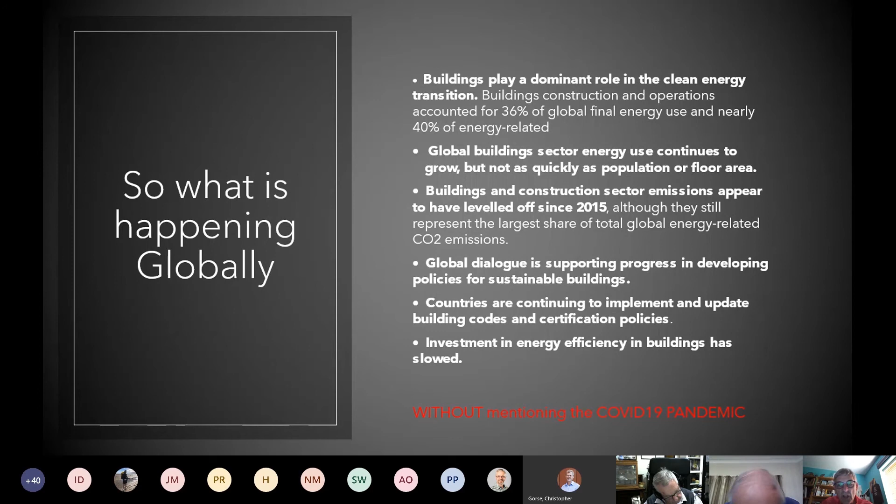And there's certainly investment in more energy efficient ways of constructing buildings. So that's just an overview. And I suppose COVID has impacted on all of this, but I'm not going to discuss that today in terms of where we're going.

Sustainable cities, and what do we mean? So a definition coming from the World Green Building Council. And I've highlighted there, wherever possible, renewable resources are used instead of non-renewable resources. And the image below there shows the Sidewalk Labs in Toronto, where Google were investing a huge amount of money. They've since pulled out, but the project still remains going ahead. And again, it's an effort by a community to try and change in relation to using more renewable sources and creating an environment that actually works for people.

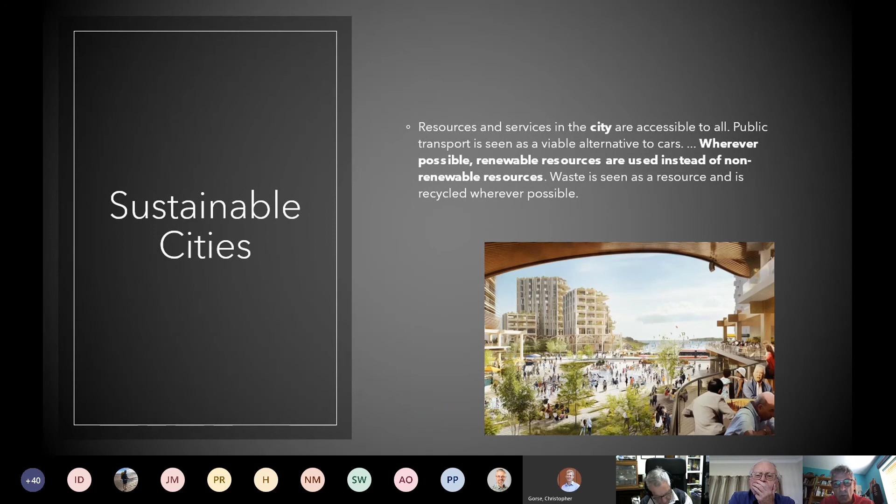Green buildings, what are they? I suppose, unfortunately, you can see the building at the bottom. Just move that aside there.

So what is a green building? And again, the World Green Building Council give a definition of what it is there. A green building is a building that in its design, construction or operation reduces or eliminates negative impacts and can create positive impacts on our climate and natural environment. Green buildings preserve precious natural resources and improve our quality of life. So that's the aspirational view in terms of green building from the World Green Building Council.

The building on the bottom there is our Central Bank in Dublin, and that is regarded as a very green building. And comparing it to the architect's impression of the building up on the right there, where we see greenery around, a comparison between those may not evidently show that the building on the bottom is actually more green than the one on the top. But again, we need to be thinking about how we impact on our environment in terms of those buildings.

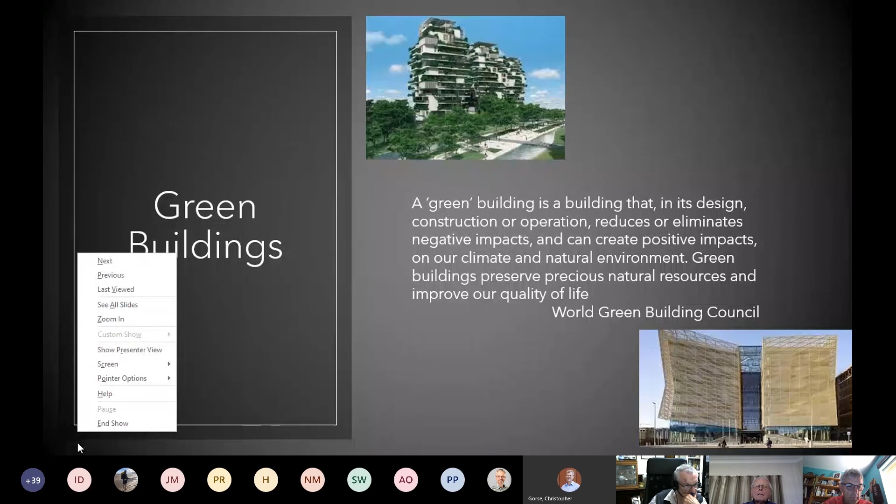Apologies. So timber as a solution then. Well, timber is now being allowed, and building codes are taking effect in relation to actually building high rise. And you can see there, and I'll give some examples of where we're going with high rise. But again, as a solution, we're now at 18 stories, where mass timber has been used in 18-story buildings around the world. And again, with research and development, architects and designers are looking at going higher.

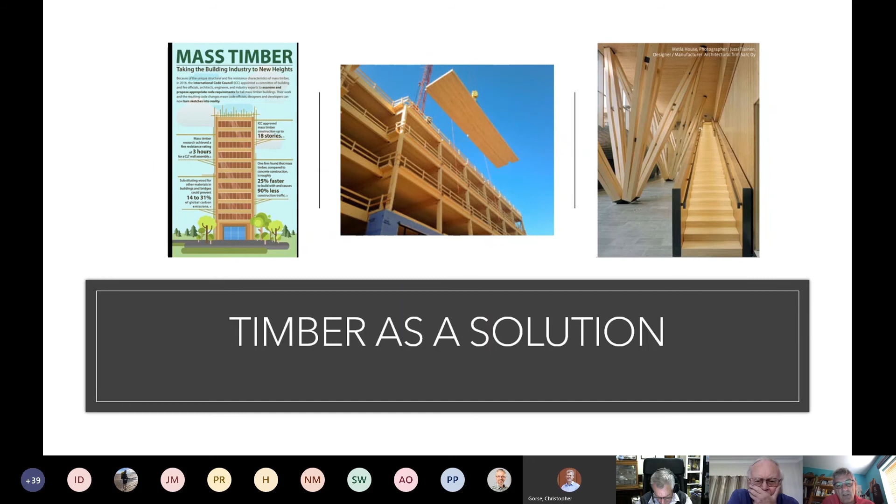The flexibility in terms of delivering projects on time. It's modular construction. It's using prefabricated units to actually build a building. So therefore, there's actually a lot more control over the projects. And aesthetically, certainly wood is very, very appealing to people, and the warmth that timber exudes is really a factor that actually helps people in terms of going forward.

What is an issue is developing the strategies in order to actually maximize the use of that material and do it in a sustainable way. And the majority of the stock taken from forests nowadays actually comes from managed forests, where they actually get certification around the extraction of wood from the forest.

Examples here, again, we have advanced not only in digital technologies, but actually in manufacturing technologies. And the slide here just demonstrates some really interesting examples of mass timber in use. And again, the advantage of timber is it's versatile. If you look at the image on the top right hand side there, it can be actually used with other materials, and connectors can be of steel or aluminium or whatever, or solid materials other than wood, to allow for those connections to be made. The advantage of mass timber is it can also be used as flooring and walls.

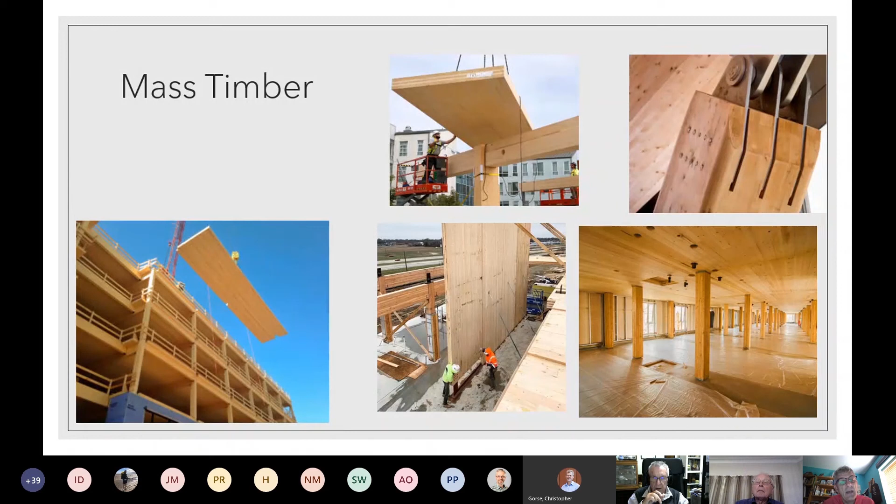And while people have a mistrust of timber in terms of fire resistance, actually timber is better in terms of fire resistance in a fire than steel, because timber, when it gets to 300 degrees, actually starts to char, and in terms of the full material being damaged, it doesn't react to fire in the same way that exposed steel would, for example.

Again, now I'm going to focus on different countries there. The image there, that's the kind of side view of a cross laminate beam. And you can see the makeup of it is different laths or lengths of material. It's used similar to the way plywood is manufactured, in that it has layers going in alternate directions. And that gives us the strength and stability to be able to be used in the construction process.

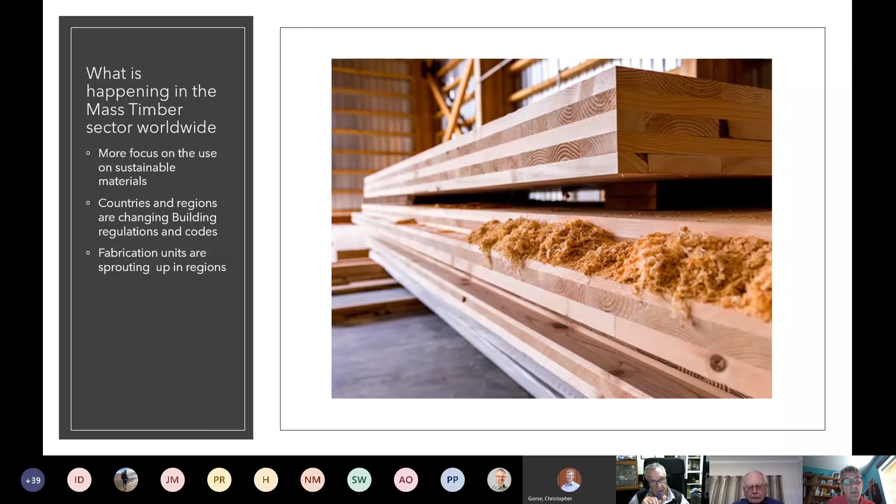And because we've advanced with technology, we can now manufacture boards up to 60 feet long. Structurlam are a company around the world, but particularly in America, and they've just recently signed off on a fabrication unit down in Texas, where they'll be able to manufacture 65 feet panels. So again, it's an interesting area.

The slide here, I'm just going to take you through a couple of regions in the US. So what we have here is some data in relation to North America and where it's going. And you can see the chart on the left-hand side there. The Americans by 2034 per year are looking to do 24,000 units in mass timber. Now that's a huge projection, and you can see the rise as we traverse towards 2034. But again, it's a commitment to building buildings through the use of mass timber.

Currently, last year in 2019, there were 78 mass timber buildings constructed in the US, and it's great to see in terms of advocating mass timber buildings. There are a number of universities in the US that have actually engaged in building mass timber buildings on campus, and I'll return to that on the next slide.

The next building here on the right is a building that's currently in construction in Milwaukee. It's going to be completed in 2021, and it's going to be the tallest mass timber apartment tower in the US when it gets completed. They're actually out of the ground at the moment, and they have a concrete platform and then they're building on top of the concrete platform with the 18 stories of mass timber.

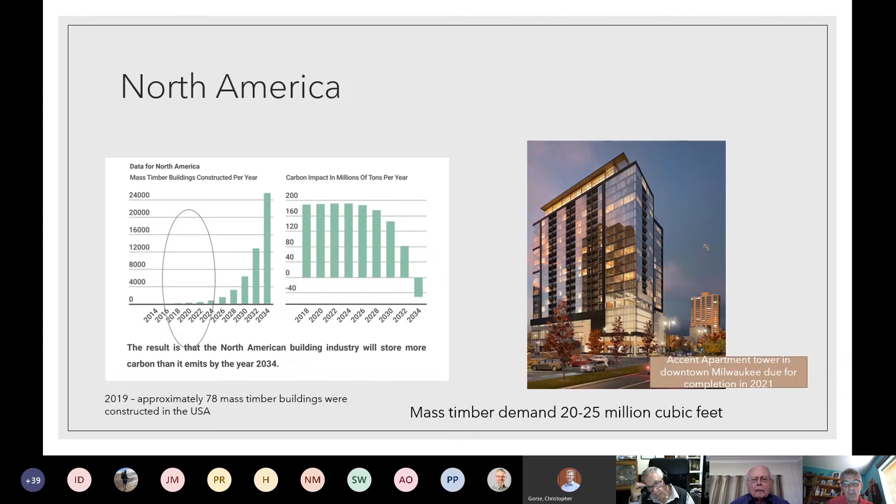But the function of it was to use it as a teaching tool. So engineers and built environment students get access to this building, and all the exposed structures are used as a means to demonstrate to students in a visual way how the building is actually put together. So again, as I said, universities are leading the way in educating students around the sustainable nature of the buildings that they're producing and getting students to engage in.

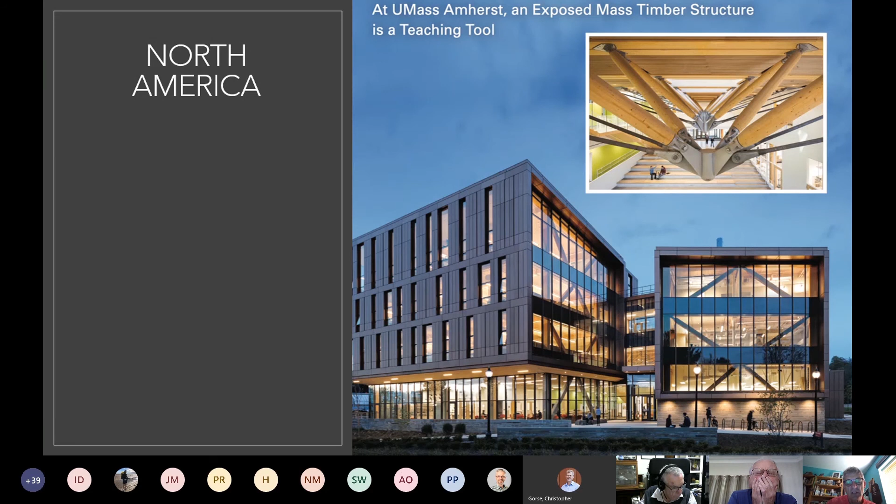Moving to Australia. So Australia's largest timber engineered commercial building is in Brisbane, and again, I'll just move him up there. It's designed by Bates Smart Architects, and you can see down at the bottom there the nice use and the nice design around the large mass timber components. But the whole building is mass timber with a glazed front.

On the right then, in Sydney, the International House by Tzannes Architects is a 7-story building, and it's constructed entirely of mass timber and engineered wood. And again, the aesthetics of these buildings are really nice in terms of people being exposed to the buildings internally, and it creates a comfort value.

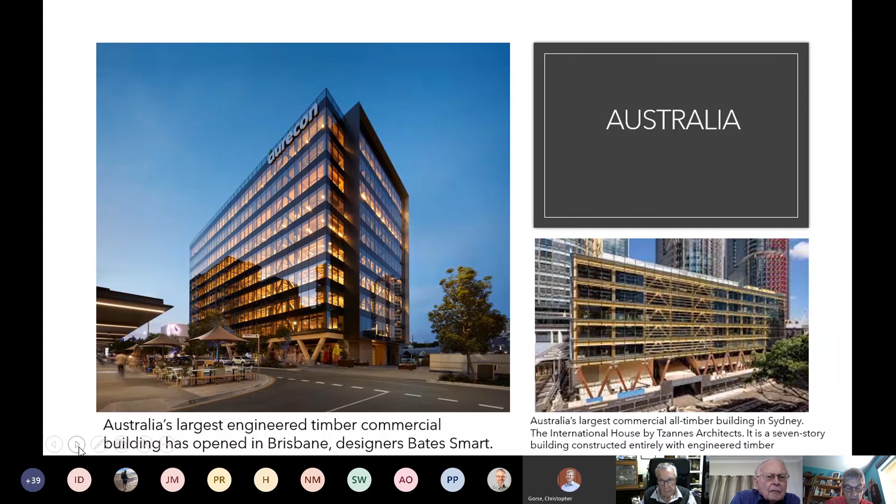South Africa has begun to engage in mass timber, and I know Emma yesterday presented what's happening in South Africa. And again linking in with universities, Nelson Mandela University are currently building the first mass timber building in South Africa, and that will come on stream in the next year or so.

And again, what they're doing in South Africa is focusing on getting the expertise in from international sources in order to develop themselves. So there's a concerted effort from the stakeholders in terms of moving forward on that.

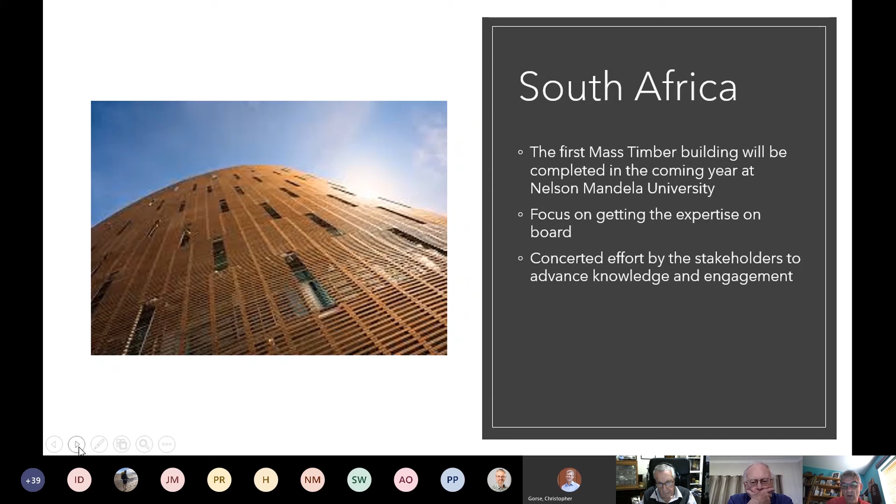Moving to Europe. People suggest that in the 1990s, mass timber was really developed in Austria and Germany. Well, I saw an interesting discourse last week from one person who came across a mass timber example from the 1900s. So I suppose what we have today is maybe higher square areas of mass timber than in the 1900s.

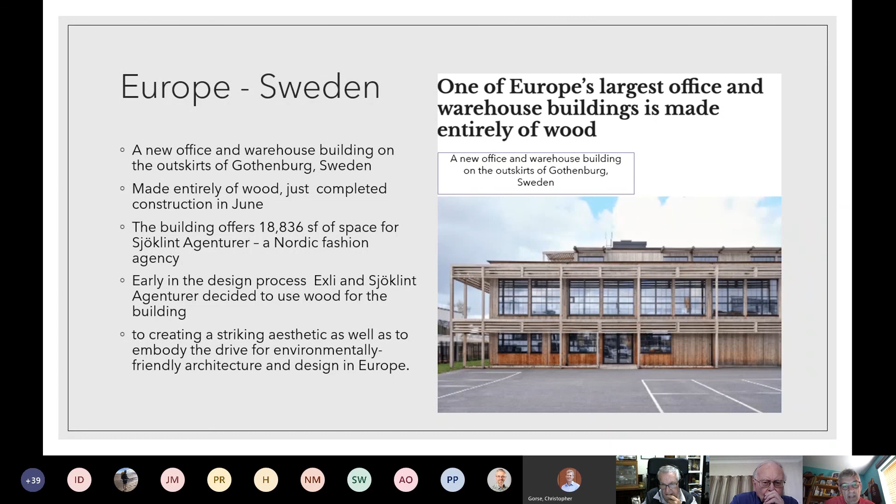But it is, I suppose, across Europe a material that has been used, and certainly Austria and Germany and the Scandinavian countries, because of the proximity of resources to them, have used timber for millennia. And again, this is just an example of a full large office warehouse building built entirely of wood, up in Göteborg in Sweden. It's just a really good example of where we're moving to in terms of mass timber.

Then the image on the right here is one of the main manufacturers of mass timber, and this is their main offices in the Tyrol. It's the company Rothoblaas, and they're doing really good work with designers and engineers in terms of rolling out quality mass timber. And again, we look to countries like Austria and Germany in terms of getting that knowledge and expertise.

In other parts of Europe, France in particular, the 2024 Olympics will be held in Paris. And what the president of France, Macron, has indicated is that 50% of buildings will be timber going forward. So they're working on a project, and this is the designer sketch that we have here at the moment, on a revamping of the Saint-Denis region or arrondissement in Paris, where they're going to house all of the Olympic Village and all of the Olympic stadia.

And again, all of the buildings are being designed and constructed with timber in mind. It's a government directive around moving to more sustainable products and sustainable manufacture in terms of the buildings. The Hyperion here was the first French residential tower built with mass timber. Again, it's a 7-story building, and it indicates where things are going.

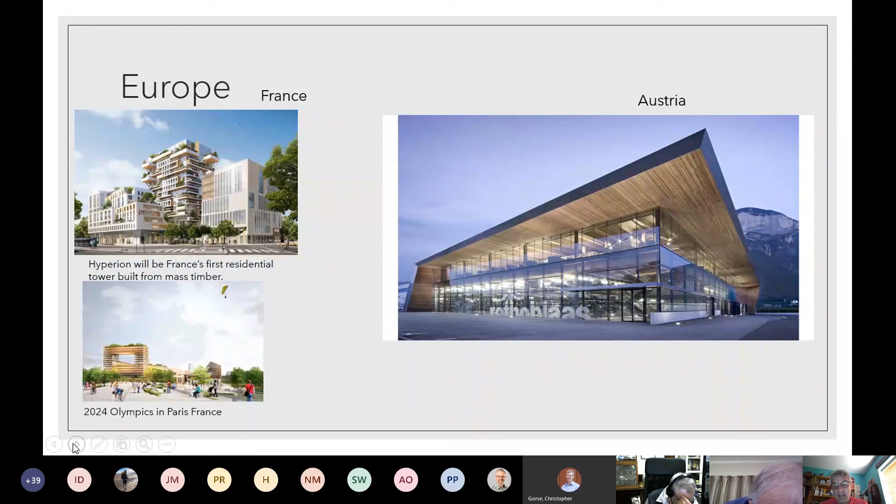The tallest is an 18-story tower, and it was accredited as the tallest mass timber building just before lockdown. It's in Brumunddal in Norway, and again, it's mass timber with a concrete core up through the centre.

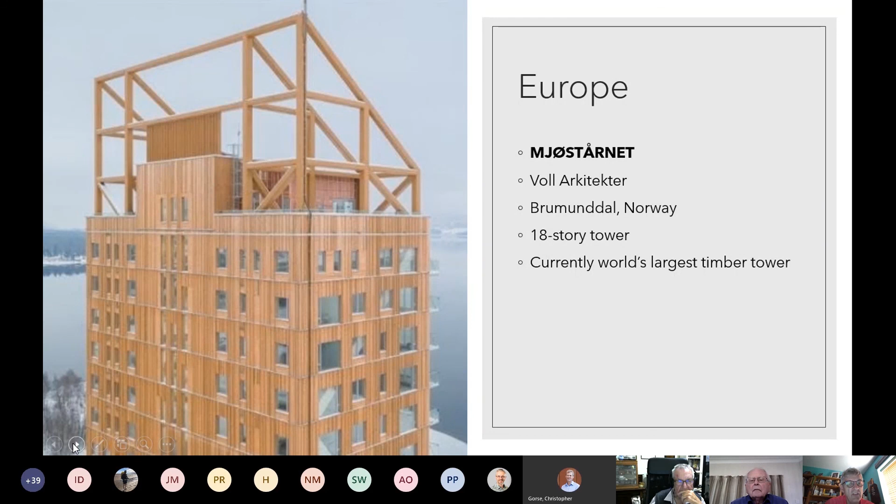And again, the designers were very, very anxious to incorporate timber into the design of it. So currently, it stands as the largest mass timber tower in the world. But I'm sure as the Americans develop their processes and designs in mass timber, things will be challenged from across the water.

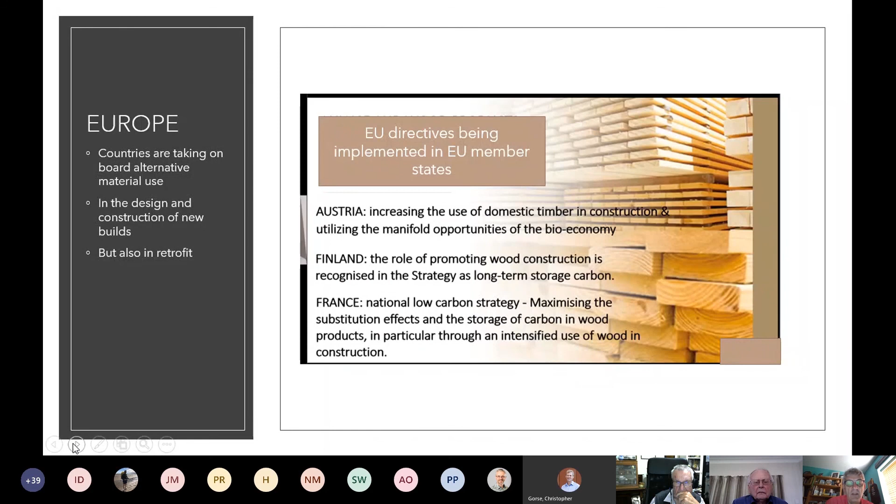Some EU directives have been put out across Europe to the member states. And again, if you look at Austria, Finland, and France, they are moving ahead with their agendas around a sustainable strategy that addresses low carbon through wood.

Not to leave out the British Isles and Ireland. So the UK experience is an example of the Vitsoe headquarters in Leamington Spa. And again, you can see there it's a big open space workshop area as part of the Vitsoe headquarters.

And what strikes me here is the use of glass and timber, and the wide open spaces that can be generated with laminate timber and mass timber, and again letting light into the workspace by facing northwards. So again, an example that the use of mass timber is going forward.

We're not without our challenges, and the challenges will be overcome as we proceed through time. But it is important to promote the benefits of mass timber, and certainly looking at the landscape across the world, and the impact of COVID on how these companies do business and how we impact people's knowledge. There's been a huge amount of webinars and seminars online for people to develop their knowledge.

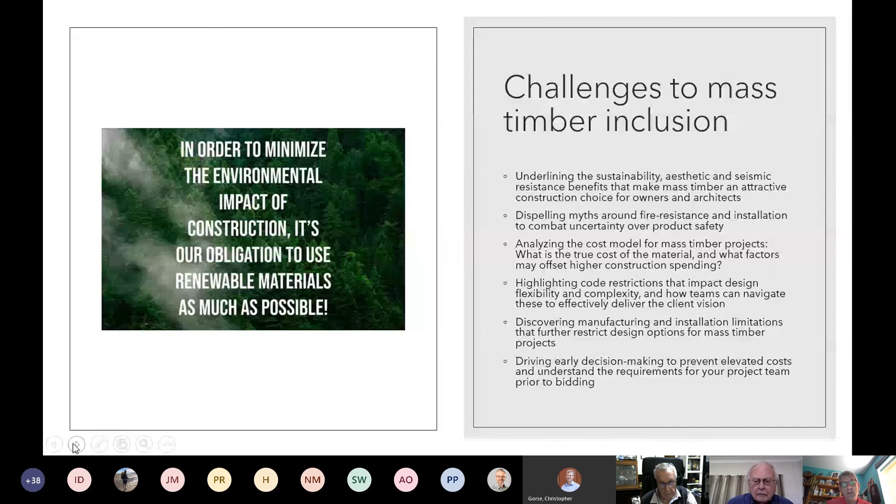And then the whole thing of collaborative projects is a challenge: the siloed effects of the different stakeholders involved in the process. And I think one of the real advantages today is that those companies associated with mass timber that do the designing, engineering and manufacture are really getting themselves out there, engaging with architects and engineers. So again, the decision process around what type of building is being used should be challenged.

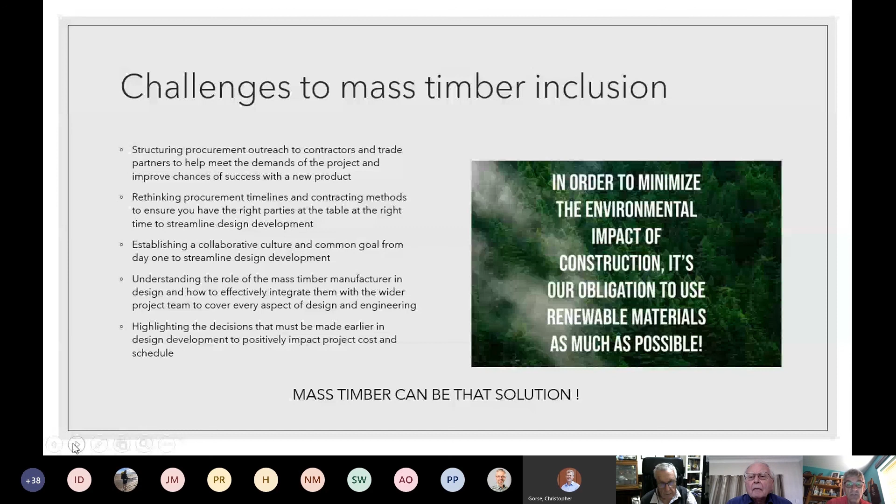The procurement process is a challenge also, and again, emphasizing the common collaborative culture, as I mentioned, is really important. And I suppose the message really is that mass timber can be the solution in terms of designing and constructing to address that climate agenda.

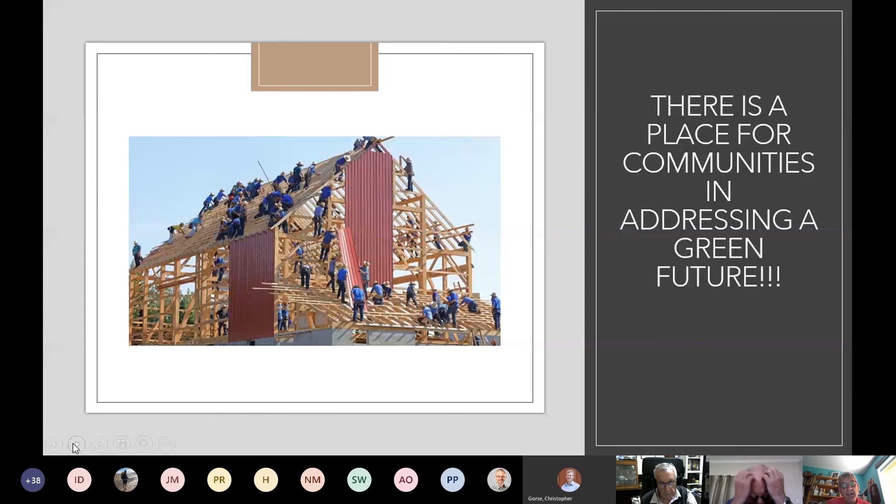Just to say, while the image there suggests communities, I wanted to mention that communities are really, really important. So this is a Quaker community that has come together and is working as a community to put a timber building or timber structure together. So we shouldn't rule communities out in having their impact on addressing the green future.